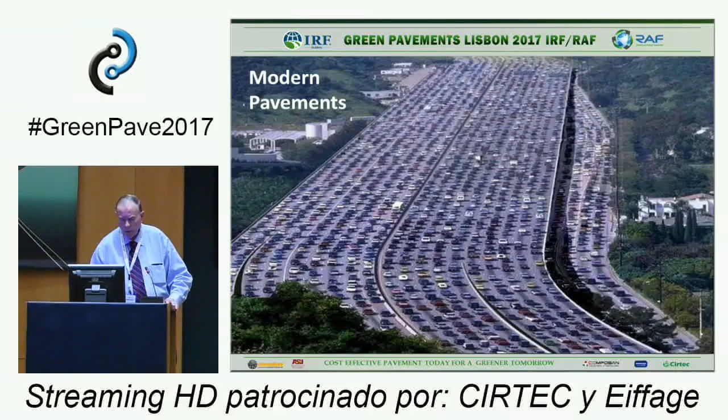So where does asphalt rubber or rubberized asphalt fit into this? You've already heard some wonderful presentations before me. I think Kamil gave a fabulous presentation on this, and George, well, he does need psychiatric care, but we won't get into that at this point in time. We'll talk about that later tonight when we've had a few more drinks, for that matter, and we'll discuss that.

But the thing about rubber and asphalt is it's turned out to be many things. I'm going to talk about these in general to kind of build a case for why it is such an undisputably great product. As George said, when it first was developed, it was patented and it was a very expensive product. All the patents are gone today, and it's reasonably inexpensive.

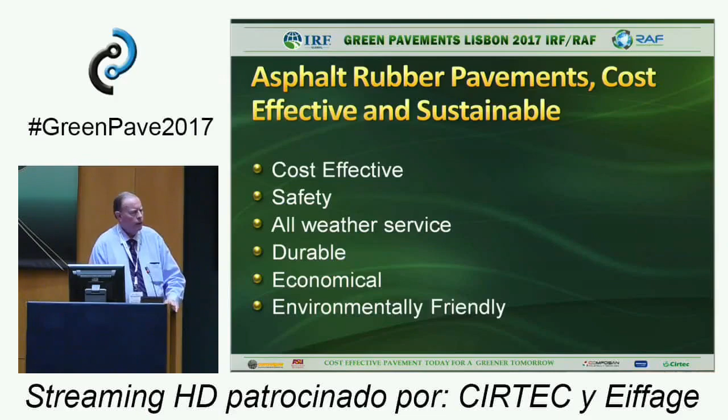It develops roadways that are safe. Of course, we want safe roads. We want all-weather service. We want to make sure we're not driving through mud puddles or potholes. Durable, something that lasts for a long time. Economical, which is sort of like cost-effective, and environmentally friendly. Environmentally friendly is kind of a new thing. That's new in the sense that the man who invented it, going back years before, really didn't have that in mind at the time.

A tire is by itself a great thing. We've seen many presentations here, and we saw one about the future, what kind of highways are in the future and everything. As I envision the future, it seems to me like there still will be tires. Now, I may be wrong, but for quite a ways in the future, people are still going to be driving on tires. So whether we're going to be driving a solar car or one that runs on batteries or whatever, it's still going to have rubber tires probably.

And there's going to be trucks with rubber tires. There's going to be airplanes with rubber tires. So there's still going to be used tires. They'll need to be recycled. We'll have to do something with them. That won't change. So what about the recycled tire rubber itself?

Well, it can do many things, and I've listed quite a few of them here, some of the good things. You've heard about these before. I'm not going to read each one of these, but you'll see some examples.

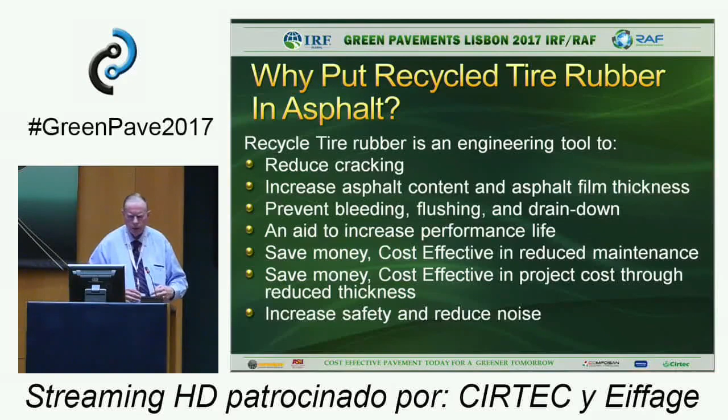So traditionally, asphalt rubber started out to be roughly about 80% asphalt binder or bitumen and 20% recycled tire rubber. The first version of this, actually, they didn't really use crumb rubber, interestingly enough. They used rubber buffings off of a tire. This was back in the days when they recapped tires, and they actually peeled the rubber off of there, so they wound up with these like shards almost. They were kind of long, and that's what they used in the beginning.

So it was a little more difficult. Later on, they went to crumb rubber, and that's pretty much what everybody uses today. There are different ways of expressing it, whether it's by total weight or by weight of the binder, so you have to keep that in mind for the percentage, but it's up around 20% recycled tire rubber.

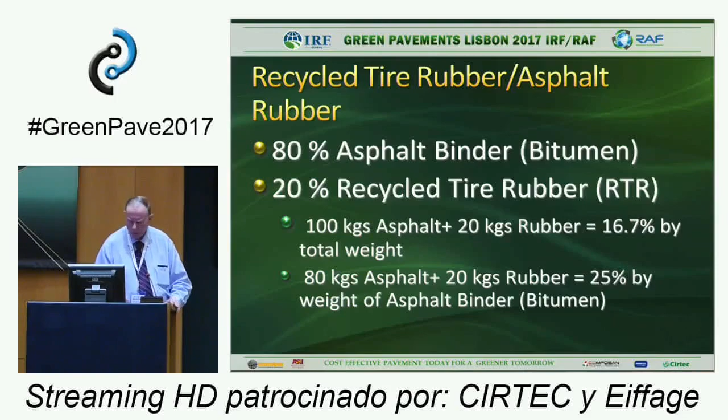Over the years, that's changed. There's a lot of other products around today, besides the 15% or more, which is kind of the traditional asphalt rubber. You have amounts that are less than 15%, maybe 10, maybe 11, which work fairly well, with a little smaller grind of rubber.

You have it mixed with polymer, some small amount of polymer, like an SBS, which is kind of a hybrid. You have a terminal blend, where they reduce the rubber really to, it's kind of digested, and then they add polymer to it. And then you have activated rubber, which George spoke about, and that's what we're going to see a demonstration of this afternoon, right, George? That's going to be that. So you'll explain that in more detail at that time.

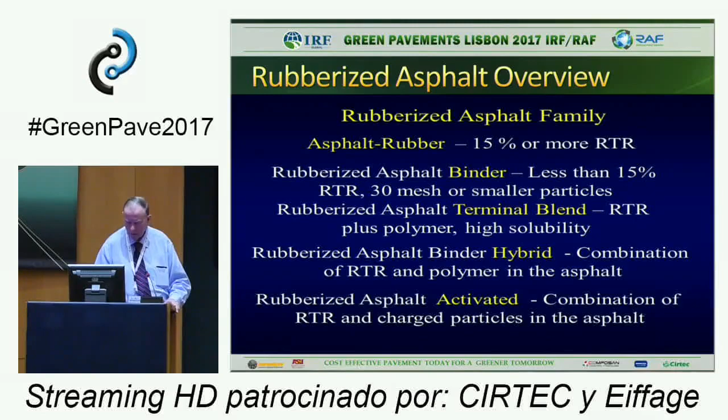So lots of different forms of the application of it. Just a few general remarks about integrating it into specifications. We heard that from our earlier speaker, that he thinks one of the drawbacks, and that is somewhat of a drawback, is the fact that the AASHTO road test, which traditionally in the United States was the Bible for designing highways, didn't really have polymer or rubber in it.

It just had neat asphalt. So how does that fit in there? Well, okay, it didn't. It wasn't at the road test.

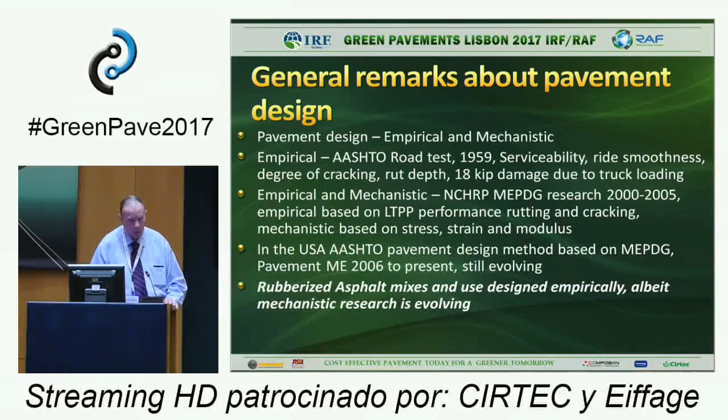What about the empirical mechanistic design, which I was on that panel? Kamil was working on the research component at Arizona State University with Dr. Matt Witczak. It doesn't really have a place in there for asphalt rubber per se. Arizona State's done some more work with that, and there are some ways they could maneuver it in there, but it was not part of that model. So integrating it into the testing mode or even the specification mode does present some problems, because historically it wasn't in there when they developed those models or those specifications.

I know our next speaker is going to be talking a lot about modeling, and he will probably have many things to say about how I'm wrong about that, but that's okay. I've only been an engineer for almost 50 years and seen some interesting things happen in that time where there were no models to fit them into. There weren't even any models, but we did them anyway. So that's what I'm trying to point out here, this convergence of wanting to force something into a model that really needs its own model, needs its own place, maybe its own set of special tests or whatever.

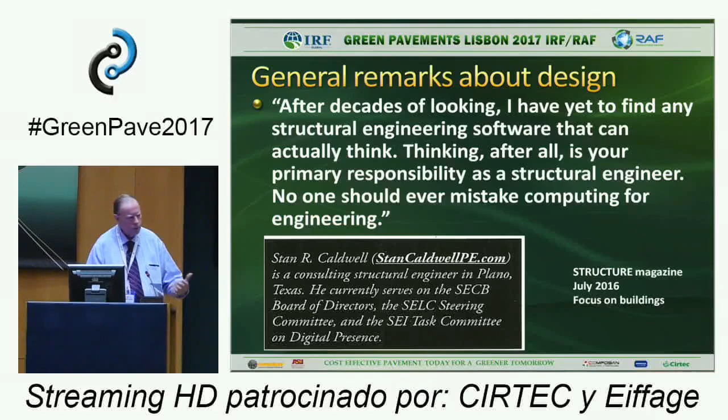Safety aspects: we don't want to build anything that's dangerous, of course. We want good skid resistance, want it to resist rutting and potholing. We want it to have a good ride, although that's not necessarily always a safety issue. We would prefer it not to be cracked. A cracked roadway by itself is not necessarily an unsafe roadway. However, when the maintenance crew goes out there to fill the cracks and they put out signs that say move over into the other lane, that could potentially be a hazardous zone. All construction zones could be a hazardous zone. So the less maintenance and upkeep we have to do on the road due to cracking, rutting, potholing, or skid resistance, the better for all of us.

We will all be safer because we don't want to be interrupted and at the last second have to make a decision to move over into another lane, or slow down, or stop texting on our phones. People do text while they're driving.

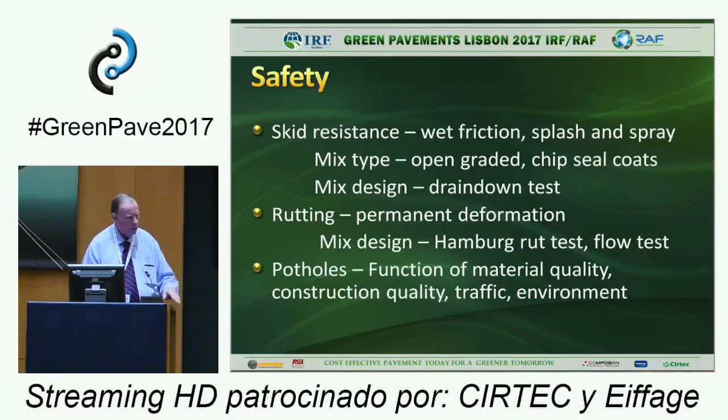Right over there, he loves to text while he's driving. He's not the only one, though.

Friction, Camille already pointed this out. We've investigated this for a long time. Open graded with rubber.

Had great results. Now people will say, I've been in meetings where people say, but we can build open graded, we don't need the rubber.

True. California invented the open graded friction course. It was called a plant mix seal coat, because basically all they did was take chips from a seal coat operation, run it through a hot plant, coat it with asphalt, and pave it with a paver, so now you had some leveling control. That was great, but the only problem was it didn't last very long, because it has about 20% air voids or more, and the film thickness of asphalt is very thin, so it wouldn't be very durable.

So yes, you can do it, you can build it. Many states did that. Federal Highway Administration promoted it in the 70s. Practically every state gave up on it because with snow and ice, it just deteriorated so rapidly that it would not stand up under traffic.

Arizona used open graded for a long time. We almost did away with it for various reasons, and then we switched over to using asphalt rubber with it. That gave us greater film thickness, meant the material could stand up longer. It also had more elasticity because of the rubber, and began to have much more durable surfaces.

Like where Camille and I live in Scottsdale, Arizona, we saw a section go down, I think around 2003. Very thin. It was one of the worst days of paving I've ever seen in my life - a 60 mile haul, it was winter. It looked terrible. Both of us, great engineers, commented to the resident engineer that this is not a good thing to do. They continued to pave, and we were sure that when they opened it to traffic on Monday, it would fall apart. It lasted 14 years.

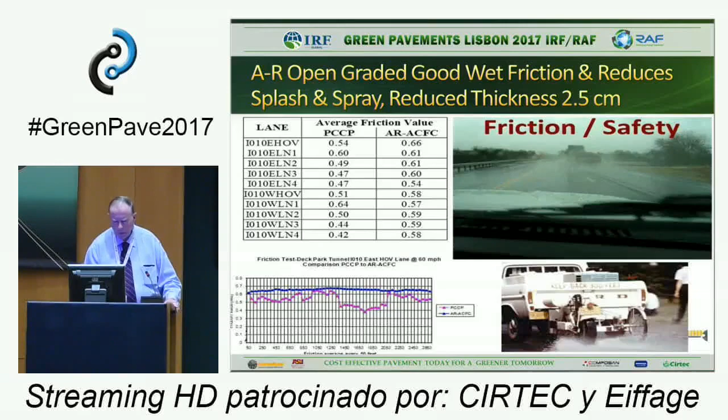They finally had to remove it because they widened the freeway and had to do some other work. Then they put back the same type of surface - a very, very durable surface, very good in skid resistance.

Camille already showed a slide like this - again, improvement of visibility because of the open graded nature. You saw this slide before, and there were also some accident statistics quoted by Texas that showed that because of this, they could reduce accidents and fatalities.

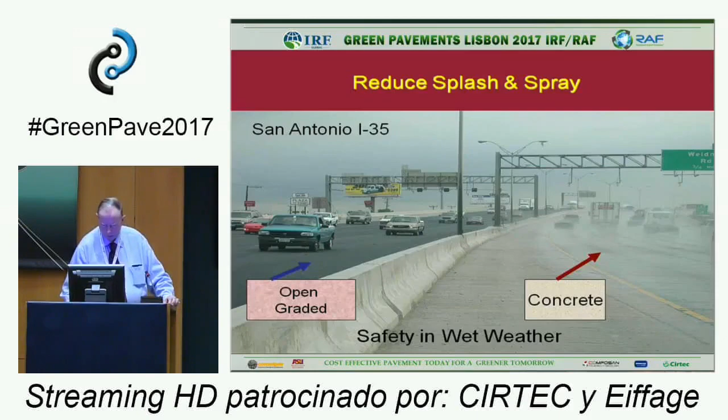We also took skid readings with our mu meter in Arizona, which measures a skid number. It's not exactly a direct friction number, but the point is, as long as you're above about 45 - and these are wet tests - your pavement is in good shape for skid resistance. You can see how the ones here with asphalt rubber maintained a very good mu meter number, a good skid resistance, wet. So that was a good thing.

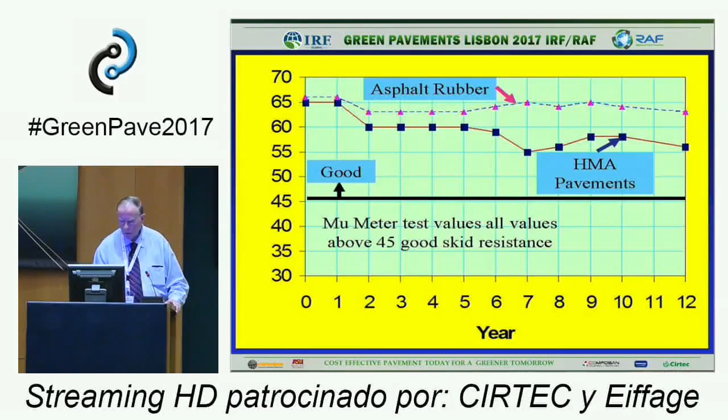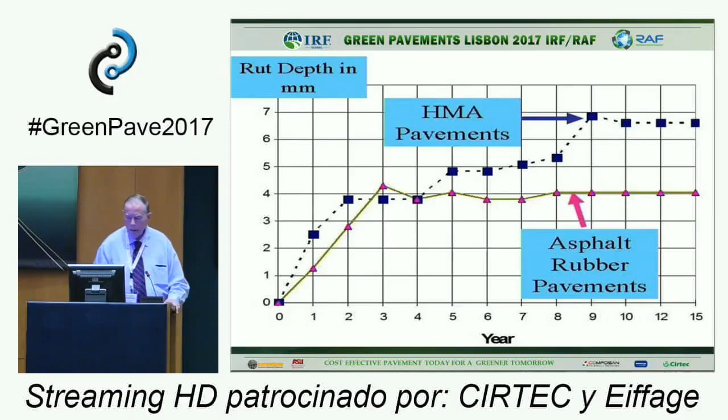Also rutting resistance - you can see here asphalt rubber, we kept track of it for a number of years. The logic behind this is that pavements that rut also tend to crack sometime around 4 or 5 years in. When they crack, more water gets into the base, and then you begin to get rutting. With the asphalt rubber, we don't get the cracks, so that process doesn't happen.

Potholing is something we always want to resist, and I'm not going to say asphalt rubber is totally resistant to this, but it certainly has stood up very well. The project being built in Jakarta, Indonesia is a good example, where they have a lot of potholing - so far it's performed beautifully. We don't really have much in the way of potholes in Arizona, probably because we don't have much rain, but it's rare that we see much potholing. We want to avoid that.

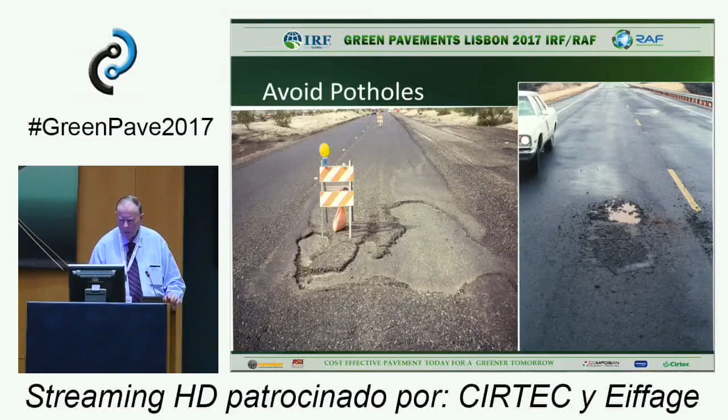We've used this material in Arizona in hot and cold climates, as has California. They have some passes going to Reno, Nevada, up in the high Sierras that get several feet of snow every year, and they've had very good success with it in cold weather.

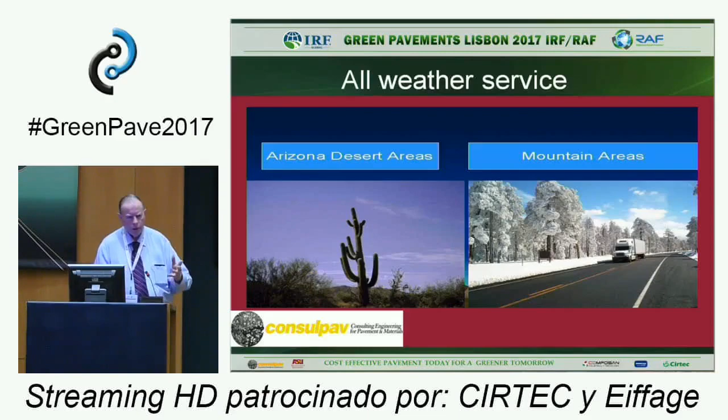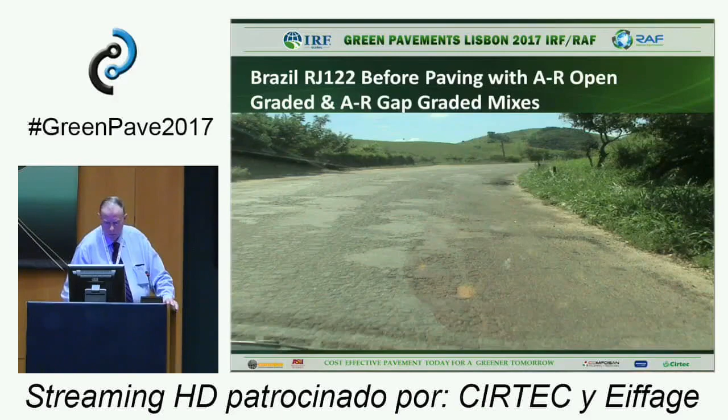This is the project that Angelo talked about. The first time I saw this project many years ago, I would have said let's just start over, tear it up, and put a new pavement out there. But as it turned out, that's not exactly what we did - we did something a little different.

This is the riding surface here - this was last year. This is open graded, this is gap graded. The shoulders were widened with a cement treated material because we wanted to widen out the road - it was kind of narrow, so we widened it out a bit.

This is what the structure was that was proposed - this is what they would have done. They would have recycled, crushed stone, and the whole thing - quite a structure.

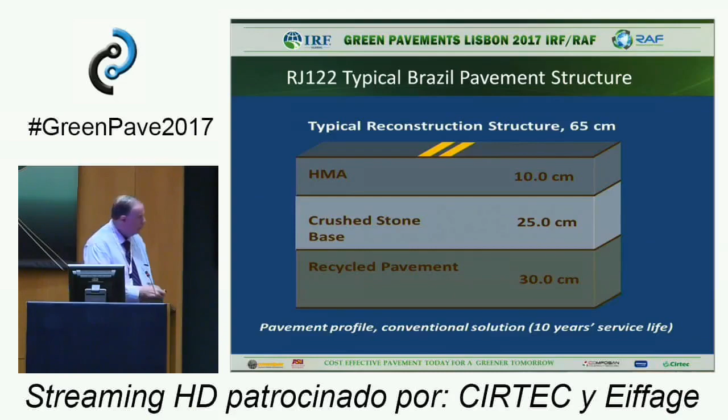This is what was done instead. Some leveling - the existing pavement was horrible. Did a little bit of leveling, and then the gap, and then the open graded. It's performing beautifully, and much less expensive. I think Angelo said 30%, I think George had this at 40%. I'm not exactly sure how they computed that number, but it was much, much less expensive.

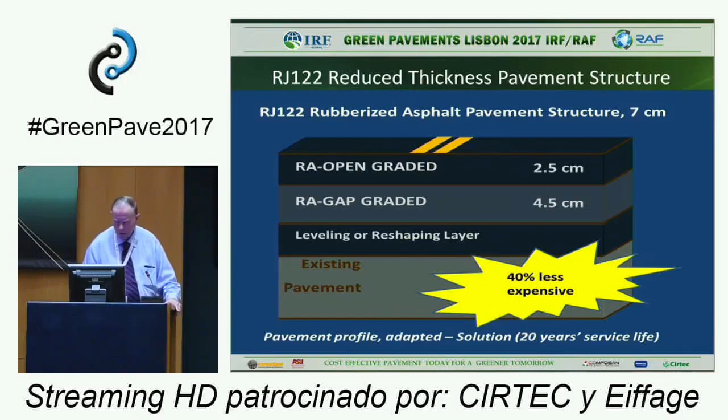The first time I actually saw this product being made was in Arizona. I was working for the Arizona Department of Transportation in 1970. This over here is Saguaro Asphalt and Petroleum. They no longer exist, but they were one of the people actually inspired to get into this business.

Atlas Rubber was a company providing the rubber. They were in California. These were actually buffings, not crumb rubber, by the way. That little conveyor broke these bags, and it went up into originally just an ordinary distributor truck, a boot truck. After they got enough of it in there, they had some guy they hired to go up on top. And this stuff's hot.

This is about 370 degrees Fahrenheit, or about 190 C. And he would take a long steel rod, because the rubber would be like a cone there, and he would stir it by hand.

He was a very brave man. And then they'd say, that's not quite right, so they put a little more in there, and they keep doing this. They thought, that's about right. I'm not sure how they knew that was about right.

Then the driver would drive ahead about 100 yards and slam on the brakes, the stuff would slosh around a little bit. This was the mixing they were doing. They had no auger drive or anything like that inside. Then you would back up and do the same thing, two or three times. They'd say, that's it, it's ready, it's now good.

And then they would try to spray it. If everything worked perfect, it would spray, but many times it did not work perfect. In fact, they actually burned up a boot truck doing this. Their theory was, let's really get it hot, and that'll be good. And they did, and it burned up the truck.

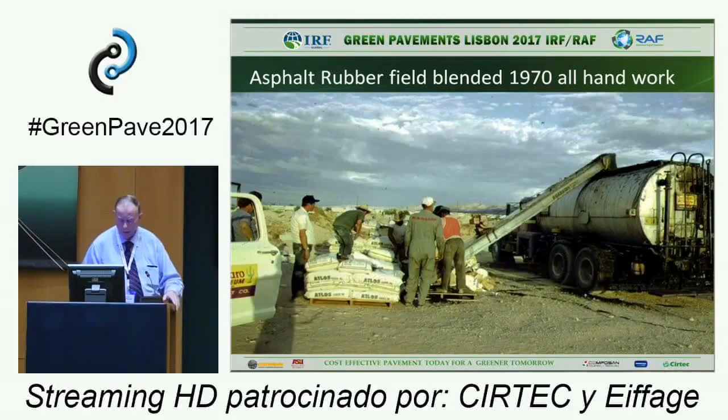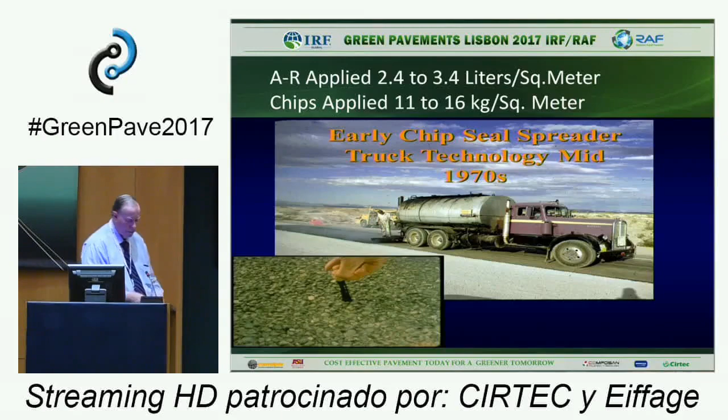So there was a lot of trial and error in the beginning, but eventually a company came along in Arizona and began to build a device that was pretty much just for asphalt rubber. It was specially built with auger drives, and the tanks were different, heated. Later on, this was all computerized, and they still build this equipment in Arizona. This is what a modern piece of equipment looks like, and they're all over the world now.

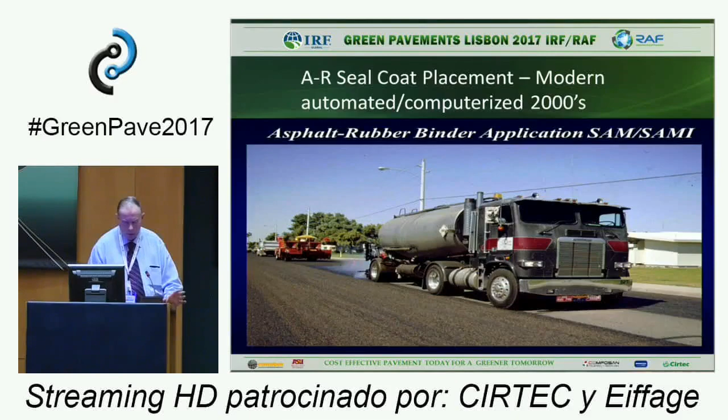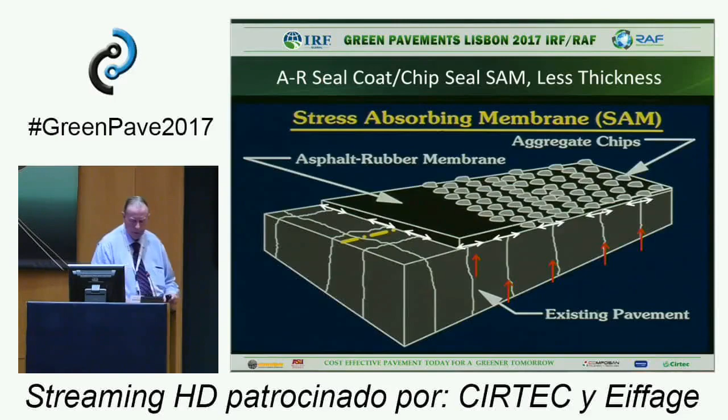A modern chip spreader supplies about twice the normal binder to the surface of the road as normal, which means you're getting a greater film thickness, which is a good thing. So the original concept here was greater film thickness with chips. This was called a SAM, stress absorbing membrane. This material was about twice the normal amount you'd have for a normal chip seal. Because this is high viscosity, it doesn't run off the road, so you can get a lot of binder right on top of the pavement, and it's an extremely sticky material.

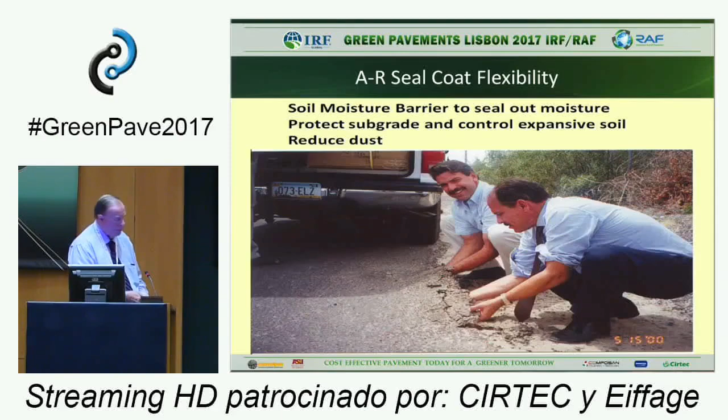It's also been used just on light traveled roads, put right on top of the soil, just to cut down the dust, but you can also drive over it. These are primarily in desert areas where we have a lot of dust.

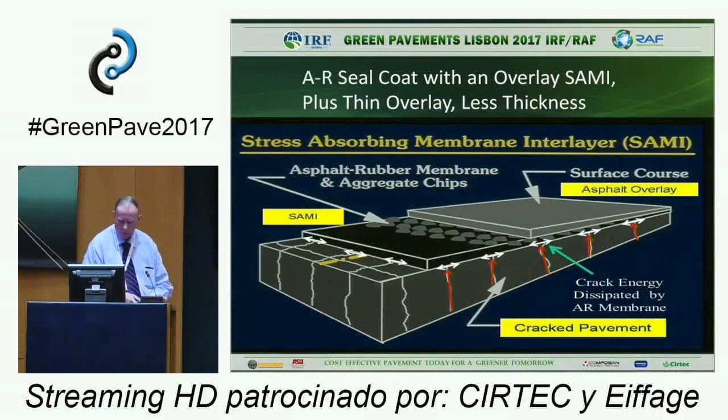Later we caught on to the idea that this seal coat doesn't give you any leveling, so let's put an overlay. And then later the overlay actually had rubber in it, gap graded as well. So there was kind of an evolution going on here.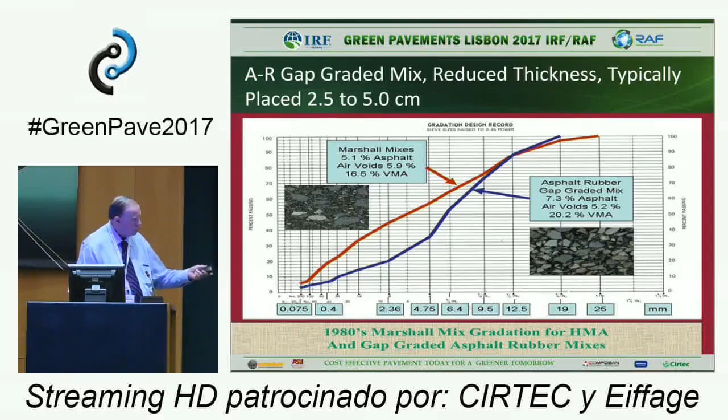This is the normal mix, 5% binder, pretty typical, dense graded. This is what's called gap graded in our state, up to 8% asphalt rubber in there, and sometimes maybe a little more. In George's case, it was over 9%. And then this is open graded.

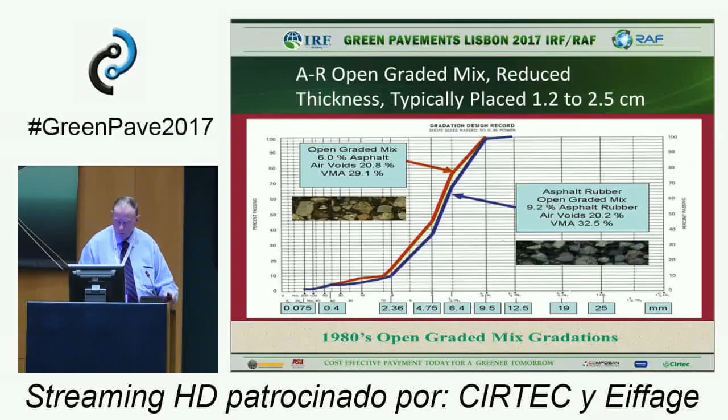Pretty much the same gradation California developed a long time ago, and they would put 6% binder. We're now putting 9 and 10% in there with the asphalt rubber, so it's a much more durable surface. Just to show you the difference in gradations, this is what you might normally see: a dense graded mix with all these different sizes of aggregate. The open graded is pretty much one size, with very little fines.

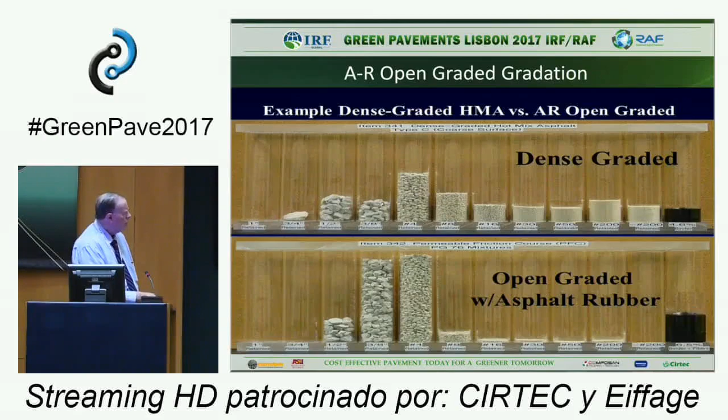Similar in some ways to an SMA, except SMAs have a lot more 200s than we use. Just an example of a cutaway. This is a typical dense graded mix in Arizona. Notice the large rock and a lot of sand. Then there's gap graded, with a lot of rock, less sand, more rock to rock contact, and less rutting. Open graded is all pretty much one size aggregate, with a lot of rock contact.

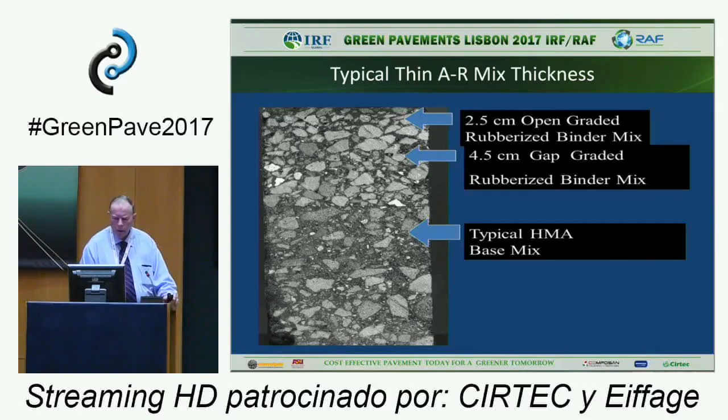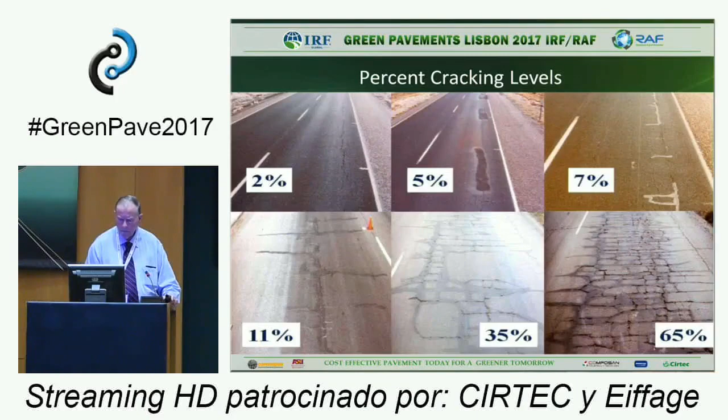Cracking, we've had our share of it in Arizona. In my day, I've seen some pretty badly cracked roads in the old days. We eventually developed a scale to give us a general idea of where we were at. You can see it around 10 or 11, you're starting to get fatigue, and by the time you pass that, it's bad, really bad. So we charted that over a number of years. This actually represents about 50,000 points.

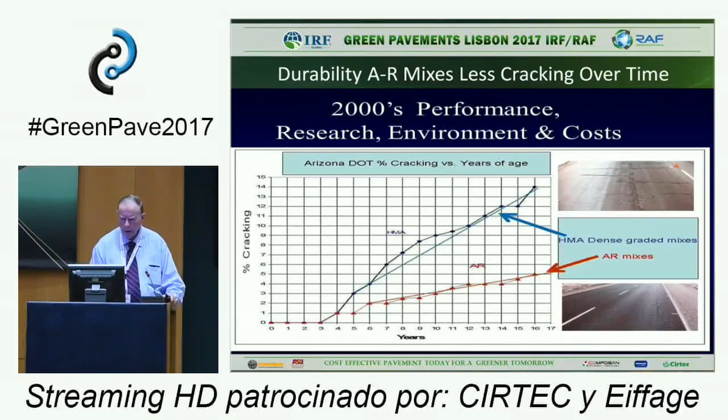HMA with no rubber versus mixes with rubber, and you can see much less cracking over a long period of time. So that was great evidence of just how good this material is. Raveling, like I said before, open graded typically would ravel, but when you added asphalt rubber, it would not. Just another example from Brazil.

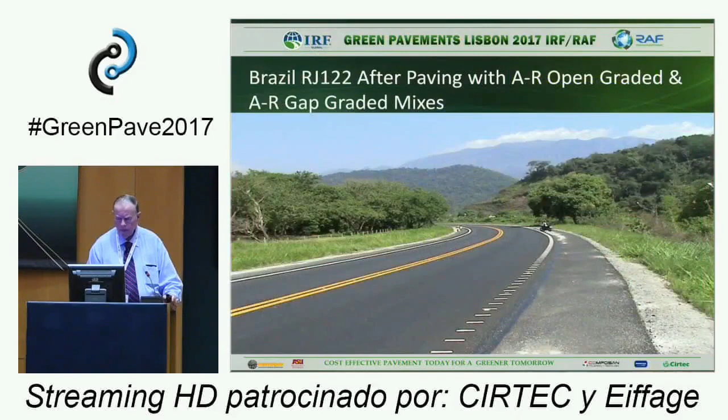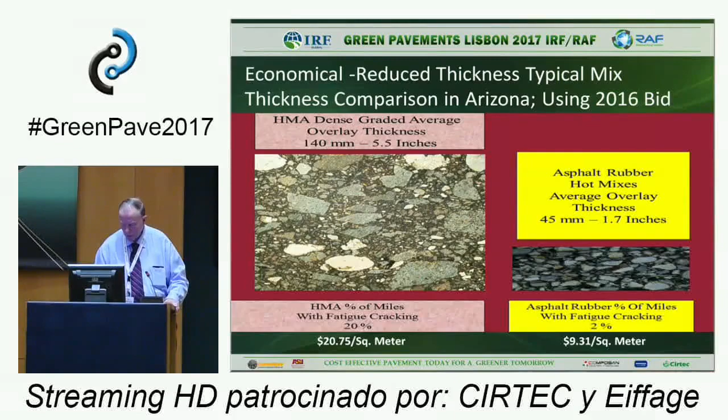This is an interesting study, not done by me or George. This was done by California, specifically the city of Rancho Cordova. They have been using asphalt rubber for a very long time in California. These are on city streets, a city street situation. They use a PCI, which is an overall rating of the quality of the roadway in terms of cracking and other distresses. This represents many, many points. You can see here the conventional has this line, and the line when you use the rubber is pushed out, so you're gaining about 7 more years of life.

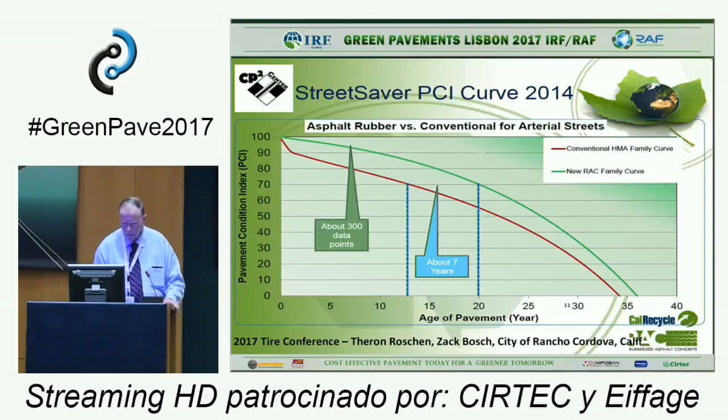So in essence, it means they don't have to do maintenance as frequently or seal coat as frequently as they would with traditional HMA type work. So they are saving money in their minds, and this was a very good study, I might add. Again, just an example of some of the economics, maintenance cost savings. There's a maintenance cost savings, and like I also say, there's also a safety component.

Regrettably, in my state, we've had maintenance people killed by traffic, in other words, run off the road or hit by vehicles. I've had them involved in accidents. Construction zones and maintenance zones are always difficult and dangerous. So this is just one type of cost, a materials cost, but there's also a safety issue cost as well, to human life and limb.

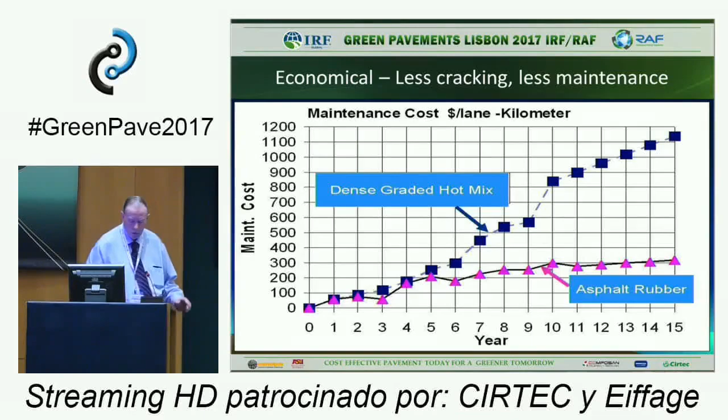Environmentally friendly, we've heard, I think Camille did an excellent job on this. We recycle the tires, and there are many things that go with that. Tire fires. Tires are a great place to grow mosquitoes. If you want to grow mosquitoes in your backyard, get some tires, throw them out there, put some water in them, and they'll be happy mosquitoes. They'll be breeding like crazy.

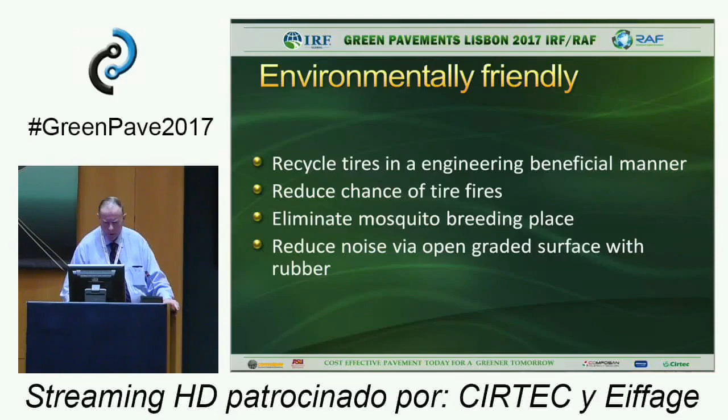And you can also reduce noise. These are just some things that are more associated with the environment. This was a bad fire that they had in California many years ago.

And it took a long time to put itself out. They can't actually put out a tire fire. It just has to burn itself out. So all of this CO2 that George loves just went up there in the upper atmosphere, and we're all going to die. And it's bad. And this went on for months and months and months.

But then the oil residue that is created by this soaks into the soil, which costs millions and millions of dollars to figure out what to do with, because you don't want it to eventually go into the water table. So you got a problem going this way, and you got a problem going that way, and it could have all been avoided if they had simply done what George said.

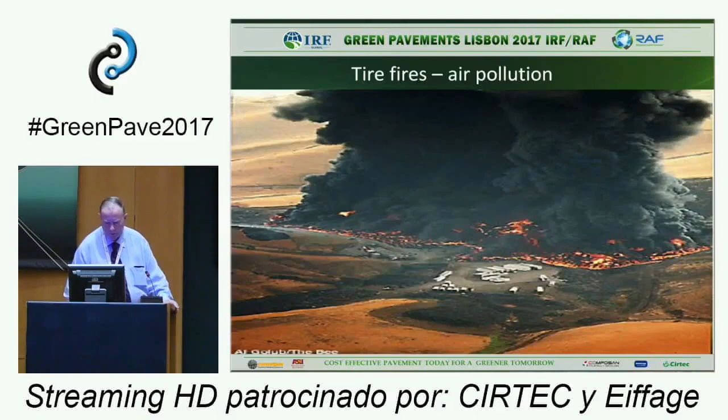Just put the recycled tire rubber in the roadway. Right, George? Right? Correct. We wouldn't have this problem. Simple solution. And then, as I say, it's a breeding ground for mosquitoes, pests, other kinds of vermin.

Noise - this was a big study that Arizona DOT and Caltrans, California DOT did. They hired an expert in the area of noise, a retired General Motors engineer. This man's job with General Motors was to make cars quieter. He would do all kinds of testing for them. And he told me that it was kind of in his line of work with General Motors, building cars and trucks and vans, whatever.

They had a simple solution to fix a squeak in squeaky parts. They'd get some rubber and shove it where the squeak is. In other words, they used the rubber as a damper, to dampen it. So when he was asked, what do you know about tires? He said, well, I do the inside of cars, but I'll give that some thought. And he invented some equipment to measure this noise right next to the tire.

And what happened here, we found that our open graded was the quietest. That's a section in Arizona on Interstate 10. The noisiest was some concrete. This was an interesting section - we've been building concrete for many years in Arizona, very noisy concrete.

And the Federal Highway Administration came out with a big study, and they said, well, you're just not doing the right kind of tining. Follow this tining equation that was developed in Wisconsin, it'll be quieter. So we built it - that's that one right there. That was the noisiest section that we ever built. And on top of it, we built it right in front of the mayor of Mesa's house.

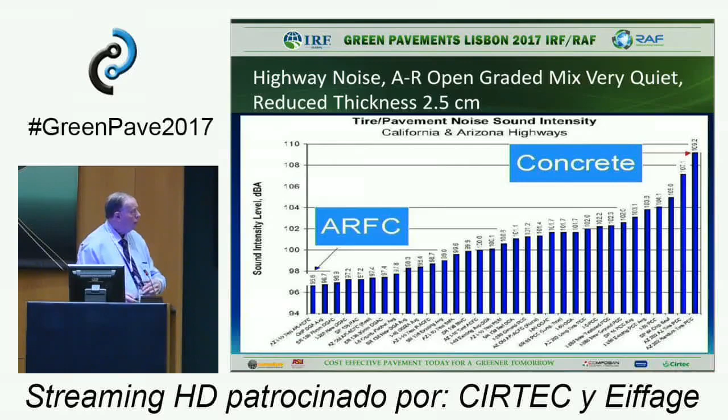And he was very unhappy about that. And we had scheduled an overlay section of concrete in the West Valley, about 20 miles from where he lived. And he objected, and he said, my road's the noisiest in the entire valley. He said, you should overlay my section of road. And so we did his first.

Same was true of the governor. We had a section that went by her house - we had a woman governor - and she said that one should be done right away. So we did. So we kept people happy, just by overlaying the concrete. So it is not necessarily the worst thing in the world. However, it does get people's attention. Noise does get everyone's attention.

And then this was a study that Camille reported on, and I think he did a great job of it. Arizona State, I think, worked with other universities on this, and some in Europe I think. The data came from Europe. So it pretty much showed what he said before. This is a great way to lower the amount of CO2, and also you're saving energy as well.

So in conclusion, George already showed this slide before. It is cost effective, and it does have many, many benefits, which we've documented.

I actually took this picture, and I always like to relate what happened that day. We had a section of road on I-10 we were examining, cutting cores, and someone in our Rubber Pavement Association asked what it would look like with all the tires that went into the roadway. So I got help, we gathered all these tires, came out there, and put them out while traffic was going by at about 10 miles an hour.

They looked at us like we were the craziest people, wondering why fools would go out there and lay tires on the road. People were slowing down to look. It was a weird day, to tell you the truth.

But it demonstrates how many tires go into a 2.5-centimeter overlay. It's a lot of tires, a lot of ground-up rubber, and I think it's very illustrative, even though I got a lot of weird looks from the traveling public.

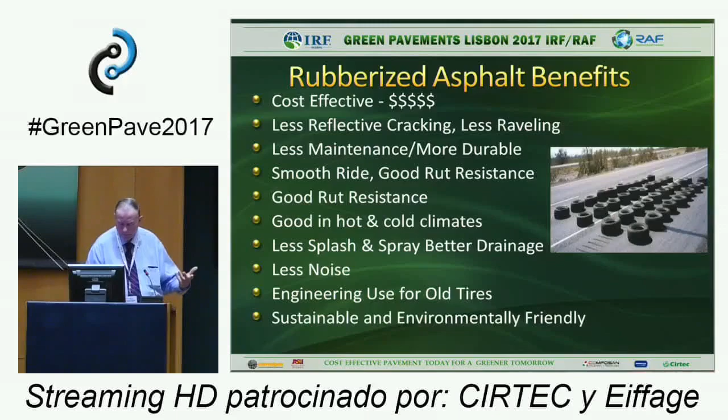I'd like to finish with this one. George and I, and to some degree Kamil, have been involved in many international conferences and proceedings. We don't have the books anymore, I'm sorry to say, but every paper in all of these books—over 300 papers—are available through Consulpav's shop. They graciously did this; Consulpav doesn't get any money out of it, it goes to the Rubberized Asphalt Foundation. But they're all there, and if you're interested, there's a big library.

We have another conference coming up in South Africa next year, in September. So you're all invited—come by. You'll see some wonderful papers on this subject.

And you'll see some lions. We're setting aside some lions for Kamil because he wants to pet them—he wants a little petting zoo where he can pet the lions, so we're going to do that as well. If you have any questions, I'd be happy to answer them, or you can ask a little later.

You have a question or a comment? Can you go back to that picture, where you have 14 centimeters versus 4.5? Sure, that's a great picture, I like that one. That one there, all right.

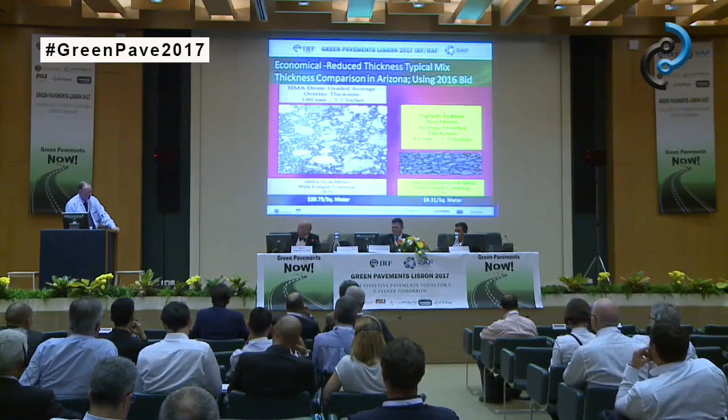Sorry, thank you. It's okay, no, all right. Like I say, any comments?

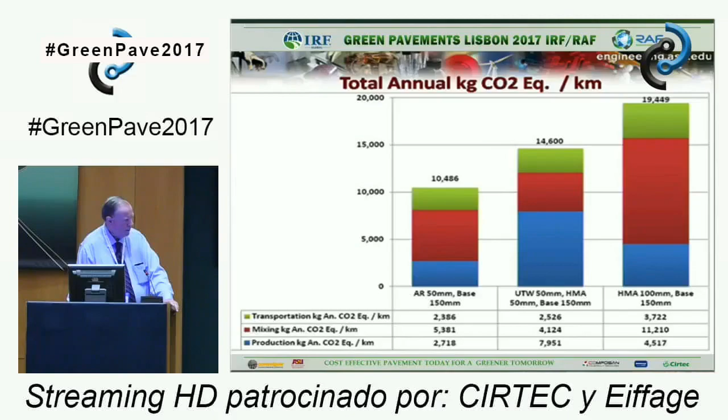By the way, I did want to make one more comment. We hear a lot about global warming, right? It's obviously here today, right now, right here in this room—a great example of global warming already, if you understand what I mean. Thank you for your attention. Thank you.